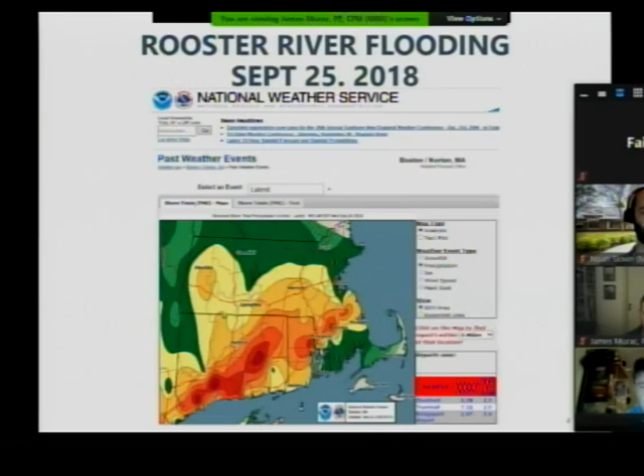Going along the timeline, this is just a quick recap, just to let people know that even though we haven't had a meeting in quite a while, the project has not been stagnant. It's been moving along. We had our first public meeting with the neighborhoods of Bennett, Bond, and Lilalyn. The second meeting we had was with the Lynbrook group. We had a Board of Selectmen presentation soliciting design funds. On January 17th, two things actually happened.

One is we contracted Milone and MacBroom to perform a feasibility study for the detention. We had picked 7 sites, just to see if they had any feasibility or any potential for detention areas.

We also, that same day, held the Rooster River workshop at the Board of Education there at 501 Kings Highway, where over 100 people attended. You may recall that one.

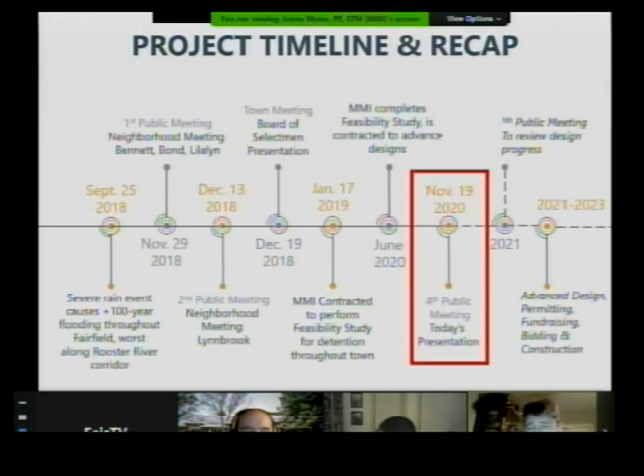So we're going to try to fast track that as soon as we can, but also realize, depending on the project, we don't have to do them all at once. So even though we have a 2 or 3 year window, certainly the smaller projects or ones that don't impact the wetlands as much, we could get done sooner than others. So with that, Jim, take it away. Thank you.

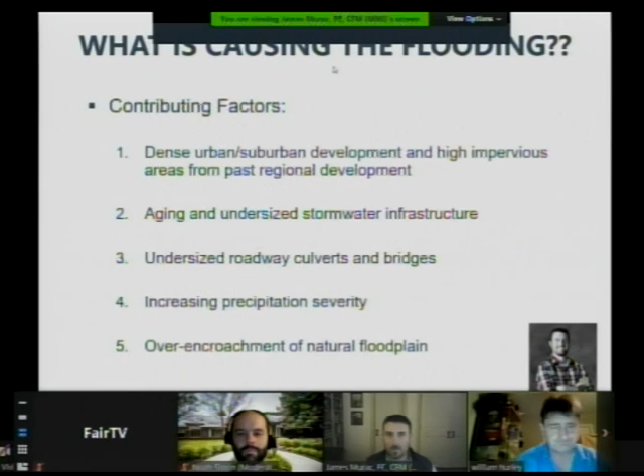Great. Thanks, Bill. You guys hear me okay? Thumbs up? All right, good.

So my name is Jim Murac. I'm a professional engineer and a certified floodplain manager and a senior engineer in the Water Resources Group of Milone and MacBroom. I've been involved with this project since early to mid 2019, and was approached by the town to get involved in looking at how we could address flooding in the Rooster River watershed.

Our contract was pretty specific in that we were looking at detention throughout the Rooster River watershed area. But for a lot of you out there who maybe don't know how we arrived at that conclusion, I wanted to give a little bit of background of why the watershed's flooding and why detention makes the most sense at this stage. So I'm just going to flip through these slides and give a quick breakdown of where this water is coming from and ways we would typically be able to deal with it.

The Rooster River is a very urban watershed. It's been historically developed quite densely since even the 50s and 60s. So there's a lot of impervious surfaces. There's roofs, parking lots, roads, and driveways, which don't infiltrate water into the ground the same way that woods and leaves and grass do.

Back before there was development here, rainwater that would fall on a wooded area would infiltrate into the ground, and it would slowly make its way to a brook, which would make its way to a river, which would take hours or days. Now with driveways and roofs and roadways, that same water is hitting the pavement, running off immediately, and arriving in these brooks in minutes. These brooks were never large enough to handle that amount of water that quickly. So development in high impervious areas is one huge factor in causing flooding.

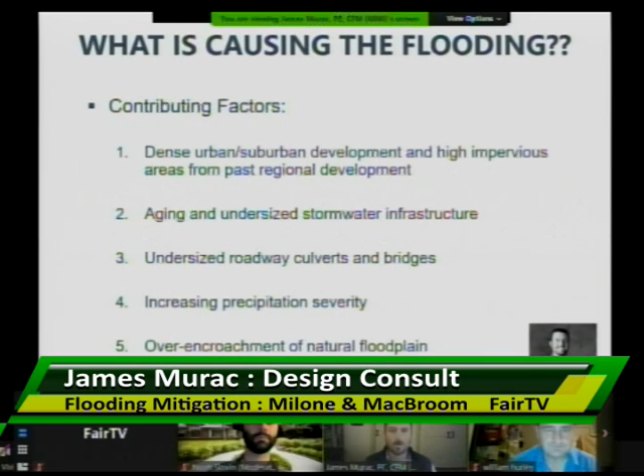You have a wide floodplain bench that's very connected to the river channel itself, and any time the water rises ever so slightly up to its banks, it goes out on this wide flat floodplain with all this vegetation and loses all of that energy. It's very spread out. All of the energy is wasted on that floodplain.

When you start filling in that floodplain and building in that floodplain, you're now concentrating that water and that energy into deeper, faster channels. It's just the same as when you sit down in a full bathtub and your body displaces that water; now you're displacing that water, which causes the water surface to rise. If you continue with that trend, it just becomes more extreme. As you start building walls on the sides, you're displacing more and more water that used to spread out.

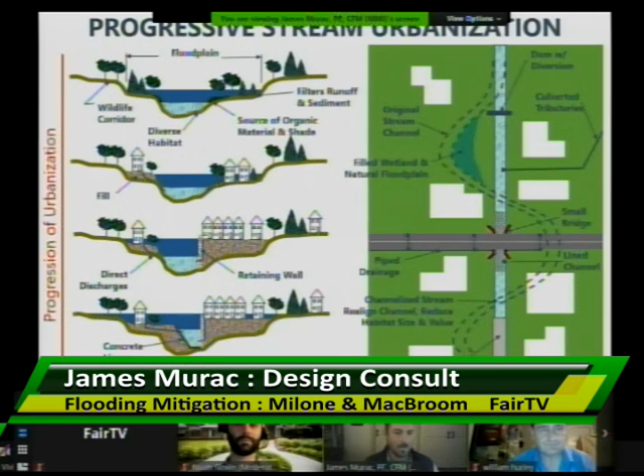And then if you channelize, this one illustrates a concrete liner on the channel. This doesn't happen all the time, but in the 1950s, the Army Corps loved putting rivers in concrete channels. It's just one more worsening. And then finally, putting it into a culvert, burying it underground completely, is the final step.

And you can see at each step, the same house that maybe didn't flood in the beginning starts to flood a little, then floods more, and more houses are flooding, and finally, all the houses are flooding because you've displaced so much of the natural floodplain. There's simply no more areas for the water to go.

So flipping through those causes and the reasons that we're here tonight, how do we address flooding? Well, we look at each one of those causes and we try to address it.

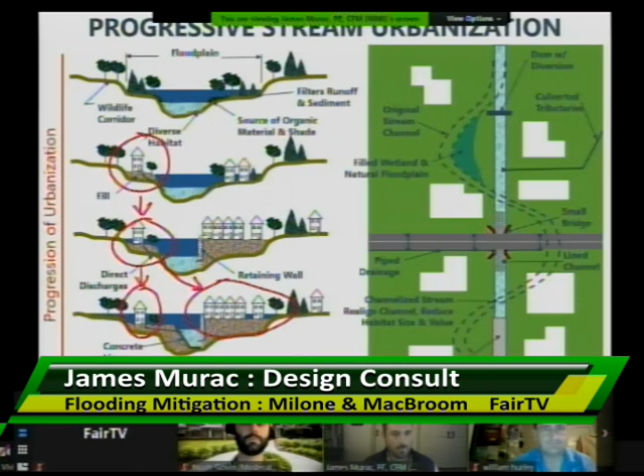So you can address urban and suburban development, but primarily you do that through regulation, through planning and zoning, wetlands, and other regulatory bodies that will have an impact in the future, but aren't necessarily going to change anything today.

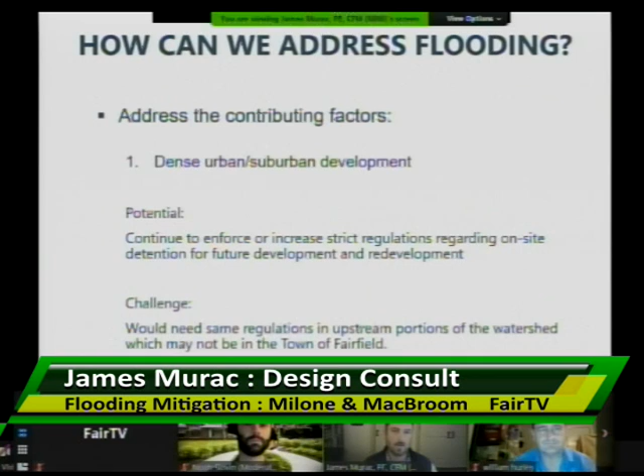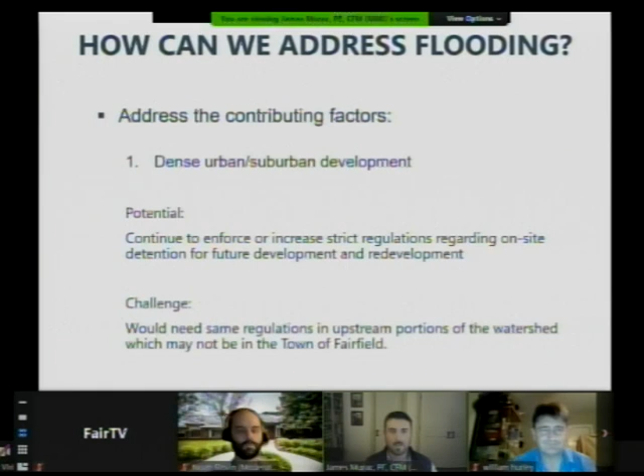And the other challenge with that I should mention too, is a lot of the water that comes from out of town, from communities from the north, you would need to have support from those communities as well, because water doesn't respect municipal boundaries. So if there are communities to the north that are highly developed and they're sending a lot of water downstream, that has to be a team effort with everyone involved.

Aging and undersized stormwater infrastructure, this should absolutely be something that every community is addressing and has on their radar, and that involves going through and having an inventory of their infrastructure townwide and understanding where things need to be fixed, the same way you would do road paving and say, this particular area is up for reinvestment, and then you have a cycle, and your public works department would just continue to do that, as I'm sure that they do. Again, this is something that's not going to fix things today, but it can incrementally fix things.

The other thing to consider with this is that as you have an inundated river such as the Rooster River, where flooding is so rampant, if you start incrementally fixing flooding problems way up in the upper portions of the watershed, you could be making it worse for those downstream. There's a finite amount of volume of water, and if it's not flooding one area, it's potentially flooding somewhere else.

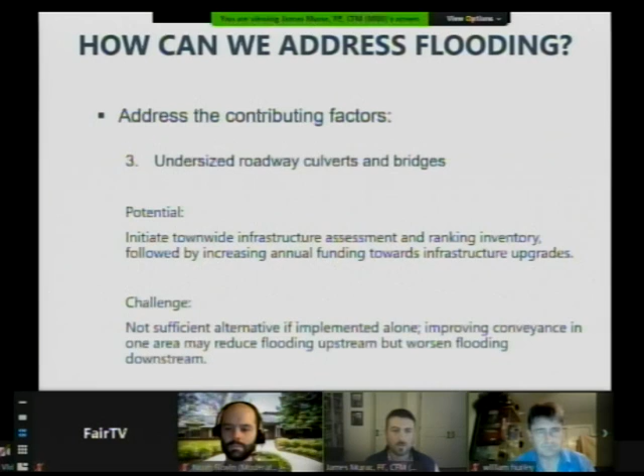So the same thing applies for undersized roadways, bridges, and culverts. Increasing the size of these will make them less prone to debris blockages, like the image that Bill showed you earlier, but it also could worsen things downstream.

Increasing precipitation severity, we can't really do too much about. The thing that we can do about it, as I started to mention, was that engineering practice is starting to catch up. Back when I started my career in 2005, Connecticut DOT was still designing things based on precipitation data that was captured from 1942 to like the 1980s. So that was historic data, and as we know, things have been changing.

The engineering practice has evolved since then, thankfully, and we are actually now looking at future projections and trying to look at the vast wealth of data that we have and extrapolating where that data is leading us. So if you design a bridge that has a 100-year service life, we're now designing things to accommodate what's going to happen in 100 years, not for what was happening 100 years ago.

And the fifth and the final contributing factor, which is why we're here, is the encroachment of the floodplain. So a lot of urban communities have this problem. It's all throughout New England and old post-industrial mill towns. Many of these rivers were encroached on. But that also leads to the lack of available real estate to reclaim any of these floodplain areas. So instead of being able to reclaim floodplain areas, we're looking at detention, which serves a very similar purpose.

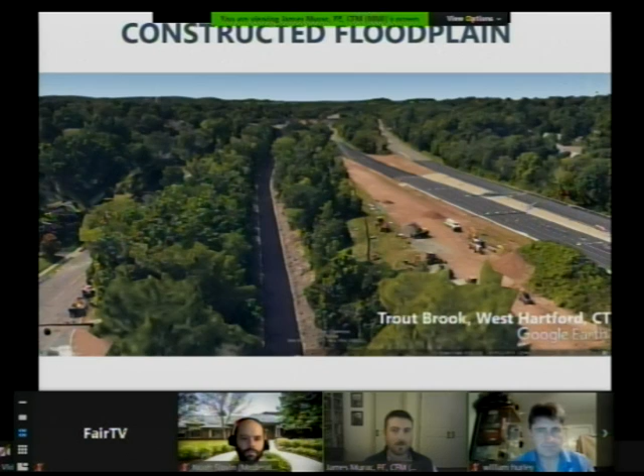So I just wanted to run through a couple quick examples to illustrate what I'm talking about. This is West Hartford. This is Trout Brook. It goes right through the center of downtown West Hartford. And this is one of those concrete lined channels I was talking about that the Army Corps loved to do right after the flood of 1955 all throughout the state.

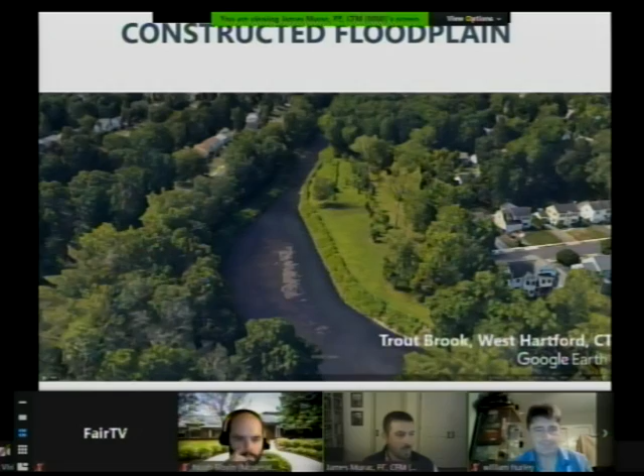But they were finding that the concrete channel was overtopping because precipitation was increasing, and they had sized it for old data. So what they did in the 80s and 90s, they hired Milone and MacBroom to look at creative solutions to fixing this, and this is what they came up with. They widened out that channel, got rid of all the concrete, and made a naturalized floodplain, right?

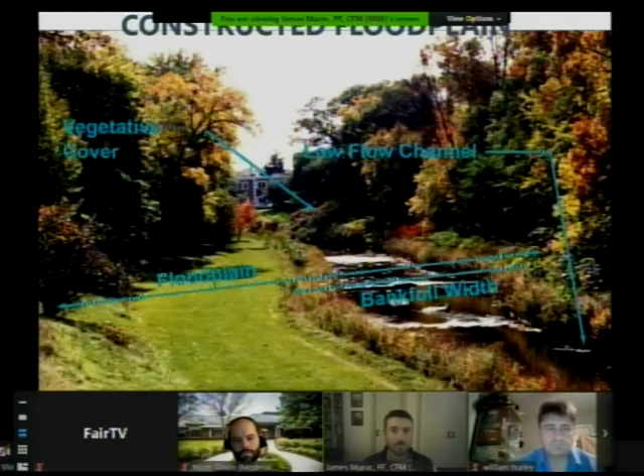So you have the bank, they call it the bankfull channel, which is sort of a sunny day stream that you see every day. But then you create that vegetated floodplain that allows for the water to expand out and harmlessly flood an area versus harmfully flooding a downtown area. It's been wildly successful. It's worked great for years. They've mitigated all of the flooding that was happening in downtown. I thought that was a relevant example because I know that there are portions of the Rooster River that look a lot like that.

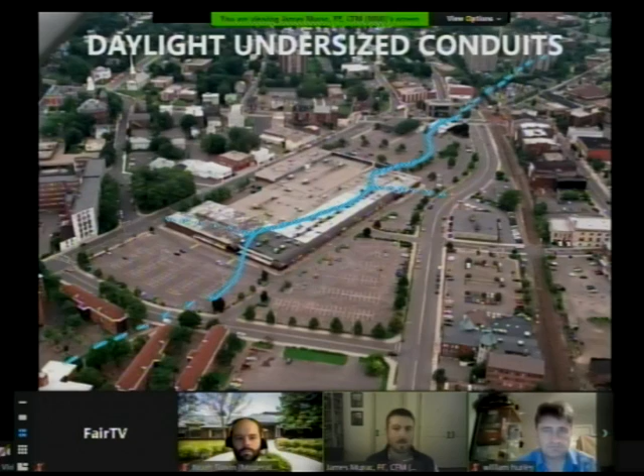The Harbor Brook, you can't see it, but it's underground along this blue line with 2 tributaries that come in, and it's a half a mile long of culverts of various sizes and shapes and configurations and ages that were just built up over time. So the city was interested in daylighting this whole area and creating a detention area and a floodplain area that could absorb some of that flood volume and help areas downstream in other portions of the city.

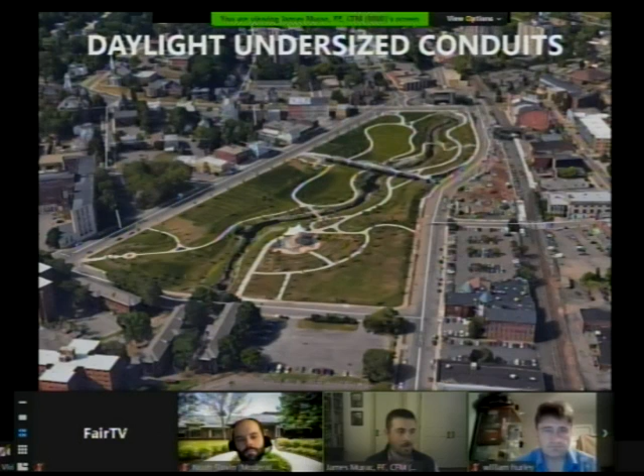So that's what we did. MMI was the lead designer on this. It was a $4.4 million project. They finished it 3 years ago. This is what it looks like today. They took the opportunity of having this flood detention area to make it into a green public space.

That's a park that most of the time is dry, but they put up the signs and made it resilient to flooding, so that in the instance of a severe flood coming through, people would be notified. People could safely leave, it would flood, then the floodwaters would recede, and they can just continue using it a day or two later.

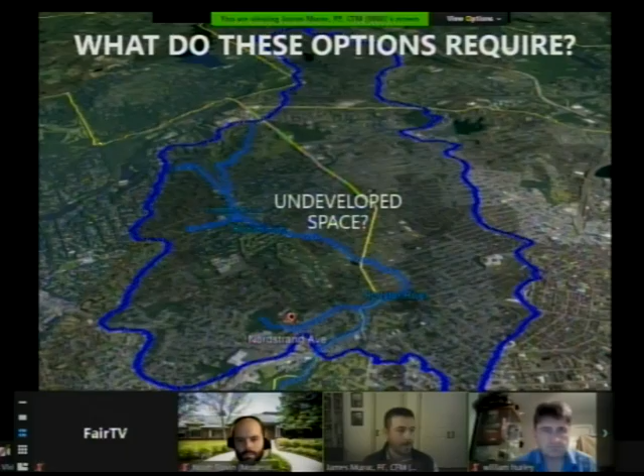I thought this was a relevant example because not only is it basically what we're talking about here when we say detention, but the Rooster River watershed has a number of areas where segments of it are below ground, and we're going to talk about some of those tonight. So those 2 options are great, but what they both require is undeveloped space. This is an image of the Rooster River watershed, with the yellow line being the town boundary between Fairfield and Bridgeport. And you can see there's just not a lot of undeveloped space.

So that leads us to our detention feasibility study. Given the constraints of space, 7 sites were identified by the town of Fairfield for us to look at and see if detention makes sense at any of them. On the slide, I say 6 sites. One of them was found not to be something that we wanted to pursue further. The cost-benefit ratio didn't make sense on that particular site, and it did not have an impact on flooding. The other 6 we think could.

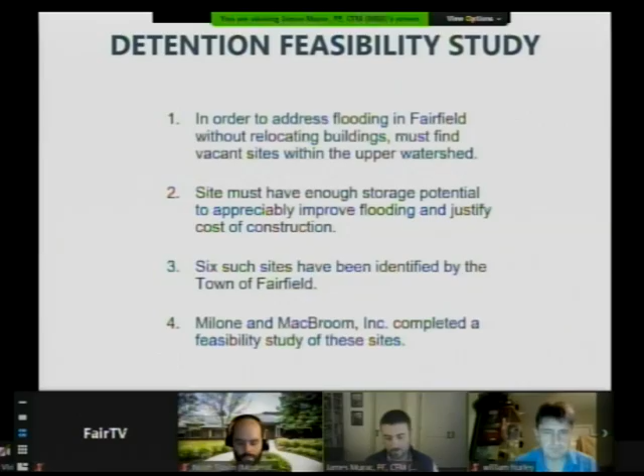So this is a quick fly video. I don't know how it's going to work over the internet. Hopefully it works for you depending on your internet speed.

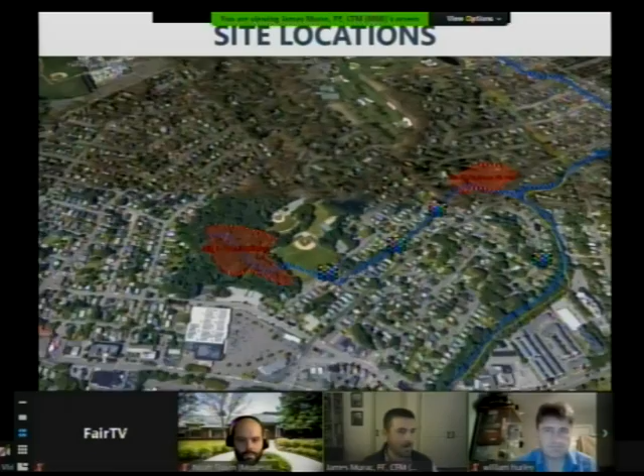This will show you where those 6 sites are located, starting at Ash Creek at Long Island Sound and going upstream. Zooming around here, we see these blue waves where flooding was reported during September 25th. It's not a comprehensive list, but it's some of what we have. Site 1 is Tunxis Hill Park on the left, and Site 2 is the Algonquin Road area. They're highlighted in red. Site 3 is the Melville Playground.

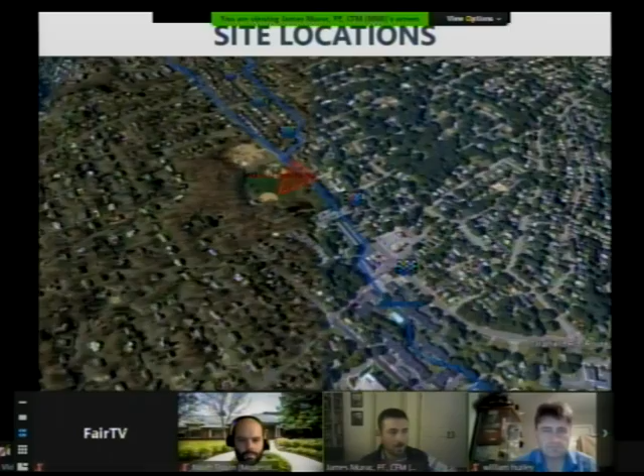Going up along Stratfield Road, we see a lot of flooding that was reported. Site 4 is Lieutenant Owen Fish Park. Trying not to speak too quickly. Flooding in the Bennett Pond area. Site 5 is Woodfield Village, and then Site 6 is Fairchild Wheeler Country Club.

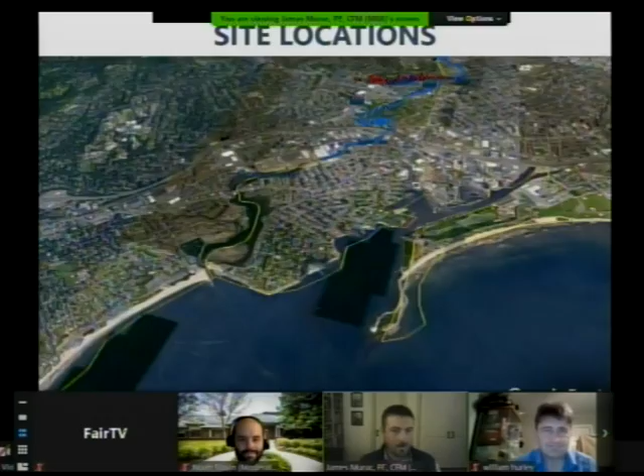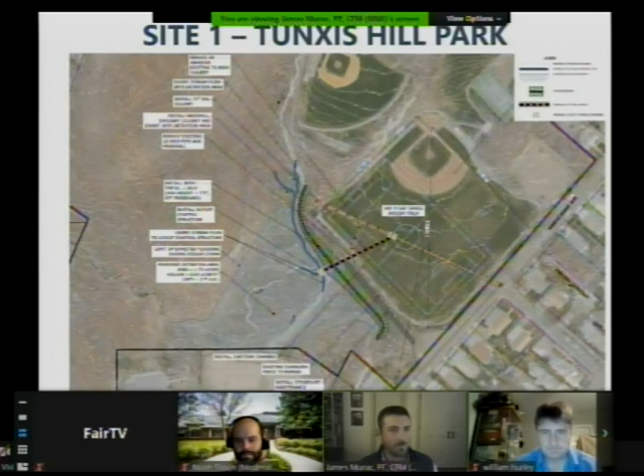So now I'm going to hand it over to Jay Williams, a landscape architect with MMI, who's going to briefly go through each of those sites and some of the elements we've developed in our concept. Thanks, Jim. Again, my name is Jason Williams. I'm a principal landscape architect with Milone and MacBroom.

I just want to walk through some of the elements of our concepts for the stormwater management that Jim talked about on these sites, starting with Tunxis Hill Park. We understand that there is significant flooding within the area of residential homes on Nordstrand Avenue, Villa Place, and Melville Avenue.

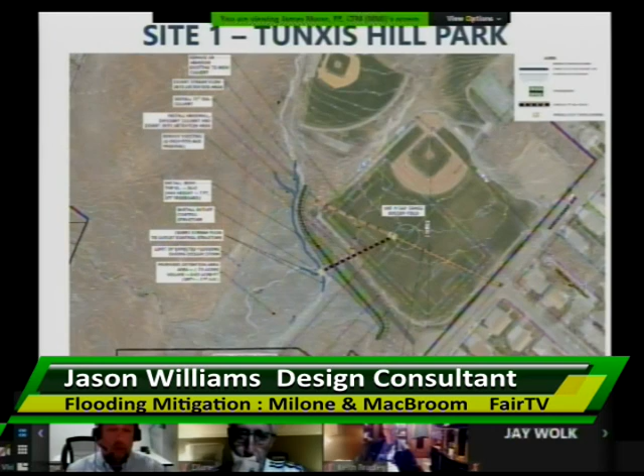There are 4 tributaries that head north and east through the wooded area in the lower left-hand corner. These tributaries combine in a pipe which runs on the western portion of the field, through the pipe underneath the field where you can see the X's, and continues out to the roadway.

Essentially, these tributaries overwhelm the existing pipe networks, and the surcharging water backs up and overflows across the athletic fields, down Nordstrand Avenue and Villa Place, and into driveways, yards and homes along Villa Avenue until it recombines with the tributary downstream. So what's one option we can do to really limit this flooding? Well, if we could go back for one sec there.

So as you can see in blue, reconfiguring the stream channels so that they move to the south and all tie in to a new outlet control structure. This is a large box that essentially takes all the storm water into it, and with a high level overflow, then discharges out underground into the center of the field into a new junction box.

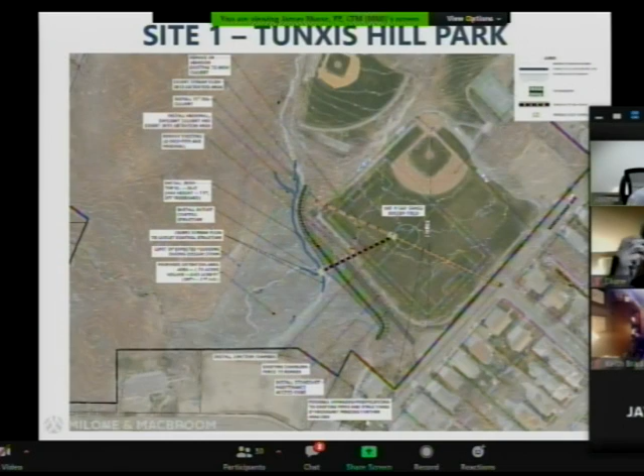But with all of the water in these tributaries coming down and flooding the field, we've got to detain it. So as you can see in green, we have a berm which runs from the northwest to the southeast and really holds back a lot of that water. In blue, you can see a proposed detention area, which is about 1.7 acres. So it's a substantial area within the woodland that would detain the water.

Once this area is detained, it goes into the outlet control structure, into the junction chamber under the ground. It would continue out onto Nordstrand Avenue underground in a pipe. Using the existing pipe is what we're currently showing, but further analysis may prove that we'd have to provide potential upgrades to that pipe. Next.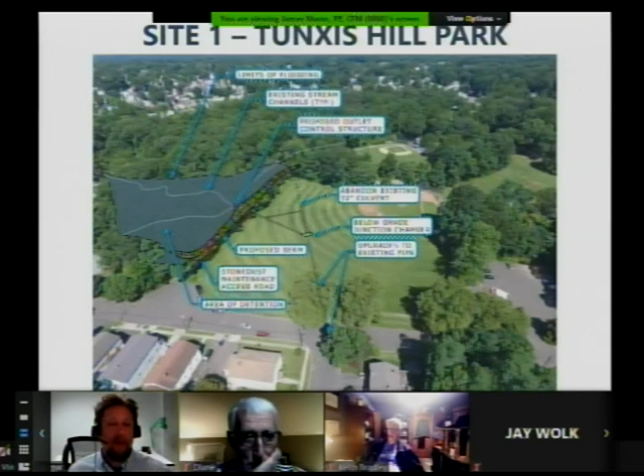So from a drone aerial view, you can see on the bottom we've got Nordstrom Avenue, and we're looking west, and you can see the athletic fields and everything that I just explained. Our berm, which is running on the left-hand side, just outside of the field of play. So I think that's important. In all of our concepts, none of our improvements are impacting any of the athletic fields of play. The berm holding back the detained water, everything going into the outlet structure, pipe underground, and then out to Nordstrom. Next slide.

In order to maintain this berm, which would be vegetated with plants and also serve a dual purpose as almost bleacher seating, we would install a stone dust maintenance access road so that the area could be weed whacked. We limit any invasive plants that are growing on it. We keep the existing chain link fence that identifies the limits of the athletic field and potentially plant some nice shade trees along Nordstrom Avenue. Next.

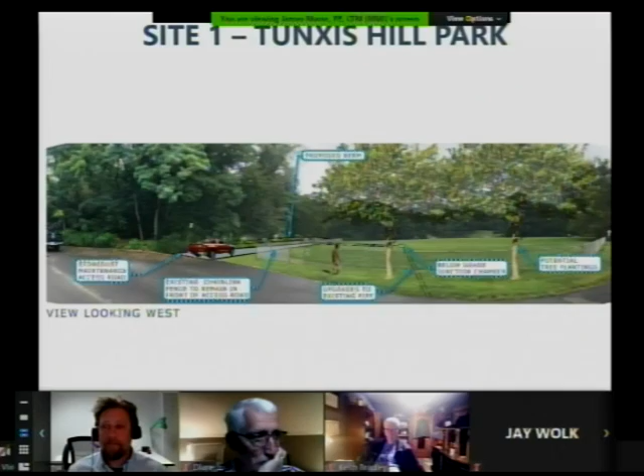So Algonquin Road is our next site. This is a privately owned parcel between Villa Avenue and Algonquin Road. This was identified as a possible candidate for the creation of a detention area. Why? Because the parcel is located just upstream of where the same tributary that flows through Tunxis Hill Park and discharges into the Rooster River lies. The parcel currently is undeveloped.

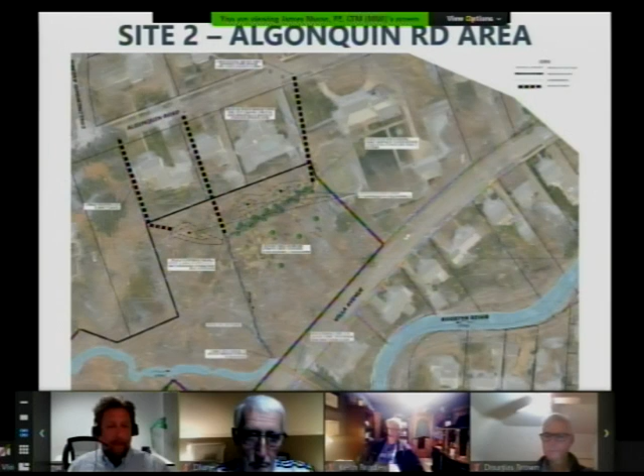It's mainly forested woodland. Now, significant roadway flooding occurs along Algonquin Road, and while there are 2 existing catch basins, the one on the right and in the center, that take storm waters underground in 2 existing pipes and discharge them into this open woodland area, we would be looking at a couple of things. One, potentially identifying the need to increase sizing of the catch basins or the pipes, and then adding an additional catch basin and pipe on the left-hand side to take on some of the flooding on Algonquin Road.

Once all of the stormwater goes through these pipes and enters the woodland, we'd be daylighting the pipes into open channels and creating depressional areas, as you can see with the dashed lines, to further detain some of the water. Water would continue to the south and enter the culvert under Villa Avenue and onto Rooster River.

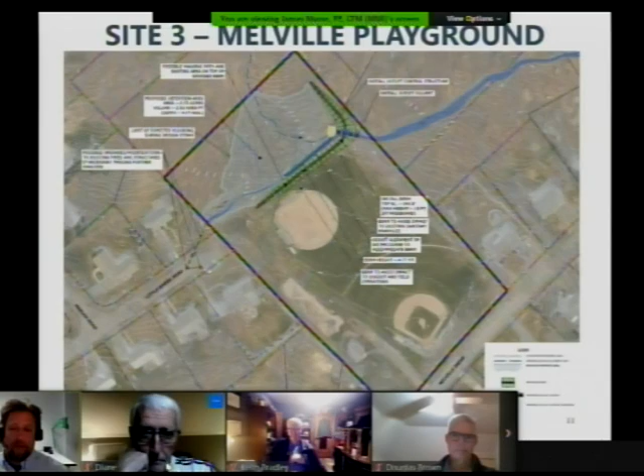Melville Playground is an important site. It's owned by the town. It's located along an unnamed tributary of the Rooster River. Roadway drainage from Little Brook Road, as you can see on the left, discharges just to the north of the park or the baseball fields, and the water course runs to the northeast along essentially the border of the baseball field.

In heavy rains, we've got a lot of flooding in this area, and so we want to hold back the water, again, with the installation of a berm to detain approximately 3/4 of an acre of water with the one main tributary heading down into the south. That all ties into an outlet control structure, as you can see in the cream color, with a pipe underneath the berm that then spills out to the northeast.

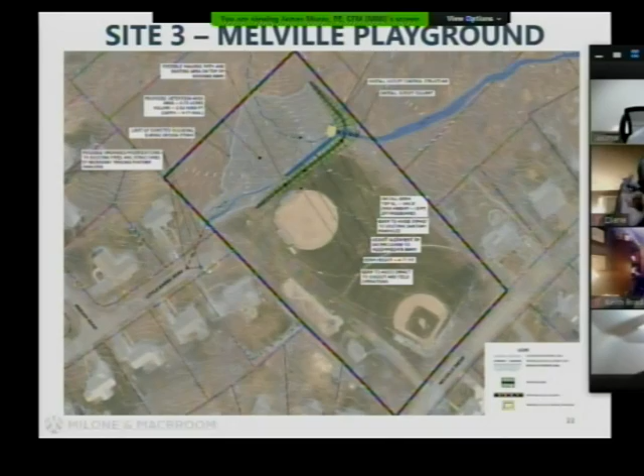Next. So here's an aerial view, again, looking to the northeast of Melville Playground. And you can see the berm, which is running just along the edge of the baseball field, that also could double, as I said, again, as almost bleacher seating. There could be a walkway on top of it, but the berm really helps to detain all of this water in the forested wetland and controlled through the outlet structure.

Next. This perspective view is also looking to the northeast and shows what that potential berm could look like. Based on this project and the hydraulic analysis that we'll be doing in the future, we wanted to show 2 options that identify different volumes of water that we can hold back so that we can show that maybe this berm wants to be 4 feet in height with seating and a walkway on top of it, or maybe this berm really needs to be more in the range of 7 feet tall.

Lieutenant Owen Fish Park, again, owned by the town, and located on London's Brook, which is another tributary of Rooster River. Currently, it flows beneath the larger baseball diamond at the top of the image in 2 6-foot wide by 3.5-foot high pipes. So it's taking on a tremendous amount of water.

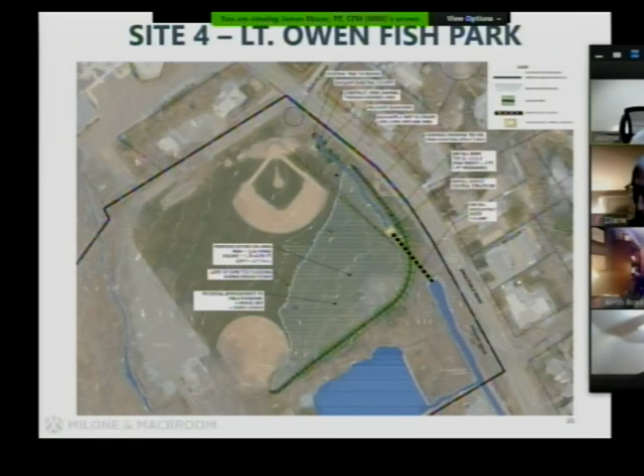This site is very important because providing detention at this site really has the potential to decrease the overall flows in the Rooster River watershed because it's located in the upper third portion of the Rooster River watershed. And lowering these flows really are going to benefit all of the properties that are located downstream in the floodplain of London's Brook.

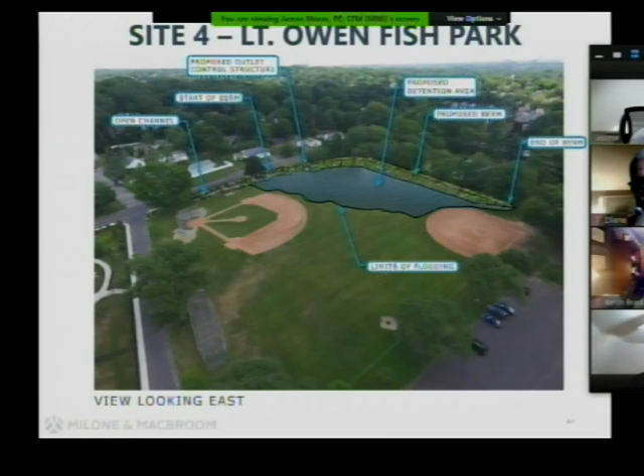As part of this project, we'd also be proposing a berm, as you can see, at the edges of the athletic play area, so the berm won't impact any play. The installation of the berm holds back, it detains the water, and you can see the limit of flooding that would encompass this area. But also more importantly, as I mentioned before, if you can see on the left-hand side, there's a very large tree on the corner. And it's from this area that these underground pipes continue along the roadway there.

What we'd be proposing to do is to open up that channel, similar to what Jim showed in Meriden with the Meriden Green, but on a much smaller level. If we can get the water out of these pipes, let it branch out into kind of a micro stream with micro floodplains, herbaceous plantings, pollinator species planted, boulders for kids to sit on, we're not only providing a stormwater element but we're also really creating a placemaking element. So families are watching ball games, kids are sitting on the sides of the streams, there's butterflies moving through.

With this open channel that moves into the lower London's Brook. Once flooded, you can see the proposed outlet control structure, very similar to previous projects, that would then be piped in a high-level overflow through the berm and into London's Brook.

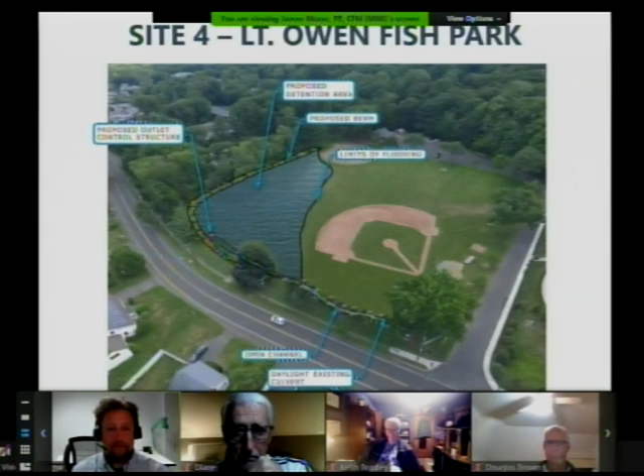Another view of this from the roadway looking southwest, you can see that daylighted existing culvert on the bottom of the page and the open channel running along the side there and the sidewalk. I mean, really kind of a beautiful element for even driving along the roadway, walking on the sidewalk, and how that continues down to the outlet structure and then further down to London's Brook, which is also daylighted.

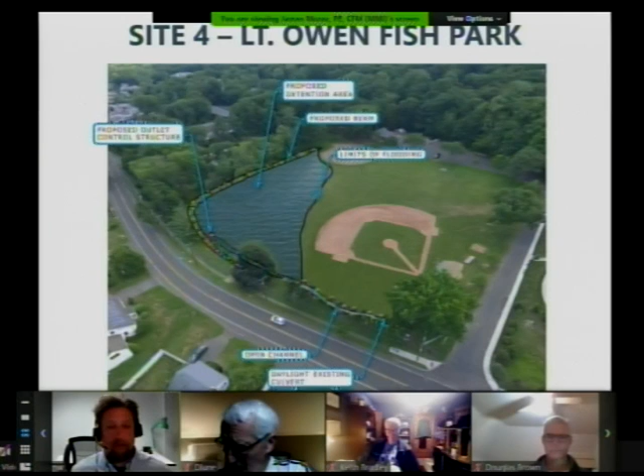Woodfield Village is our fifth site. This is a condominium development that actually includes a lot of detention basins throughout the site. Most of the detention basins are in forested woodlands, and they are controlled by 12-foot by 12-foot concrete outlet structures that have a sluice gate in them. These sluice gates are mainly left open in accordance with the original engineering design that was done with them.

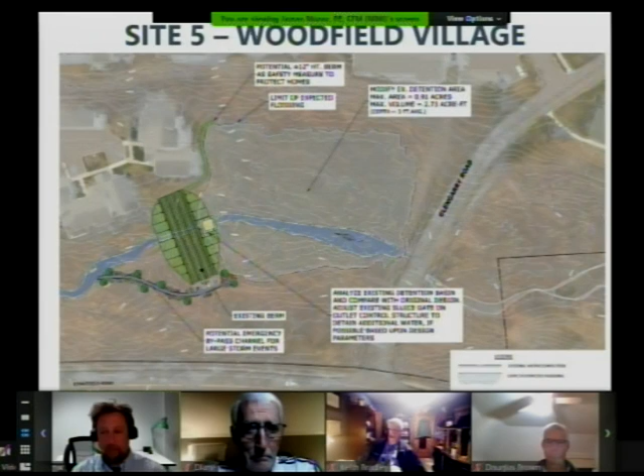This concept proposes to increase the detention at one or maybe more based on our hydraulic analysis that really would include just very slight modifications to the actual structure, as you can see in cream, no monumental structural changes. As you can see in green, there's an existing earthen berm here. As part of this project, heading to the north of this berm, we would install a 12-inch high, small little berm. Really, the main reason for this is to protect that one home there. We obviously... go back.

Sorry, Jay, I didn't mean to do that. I did want to just clarify that would be a 12-inch berm. Oh, did I say 12 feet? Sorry about that. Yeah, so, just a small little berm to further detain the area.

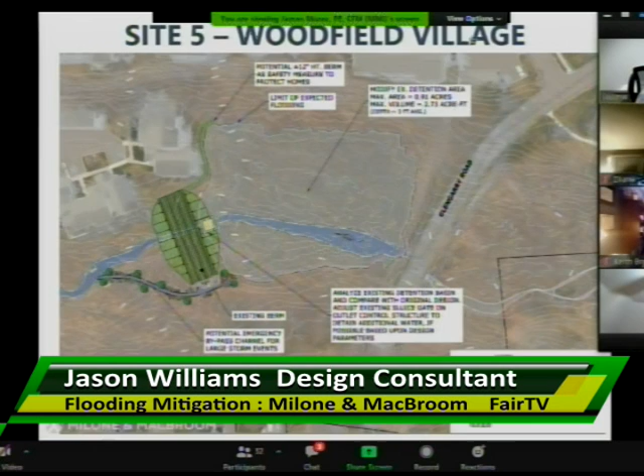And you can see the area of detention. It's approximately 1 acre, so it is a pretty large area. But also just on the southern side of that, we would be installing what we call an emergency bypass channel, which is nothing more than a small little stream with plantings around it that acts almost as a pressure release valve when the detention area does fill up. We're providing an area for this water to release and continue down and tie into the brook.

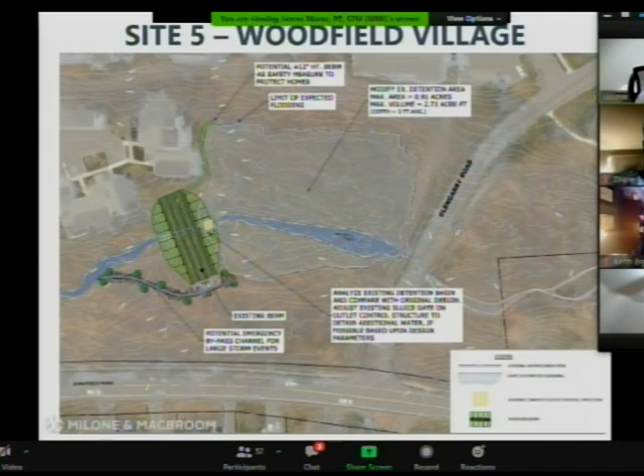Fairchild Wheeler Country Club is our last site. Most people on the call probably are familiar with the country club. It's actually located in Bridgeport. The property is located at the headwaters of London Brook. It's directly upstream of Bennett Street and Bond Street, where severe flooding has occurred. Additionally, there's flooding that occurs on residences on Casimir Drive.

As part of this project, we'd be looking along this southern property line here to install a new berm, just to the right of that to tie an existing drainage swale just behind that berm into another outlet control structure, which you can see in the cream color. So as you can see, moving through the golf course is this existing stream where cart paths do traverse over.

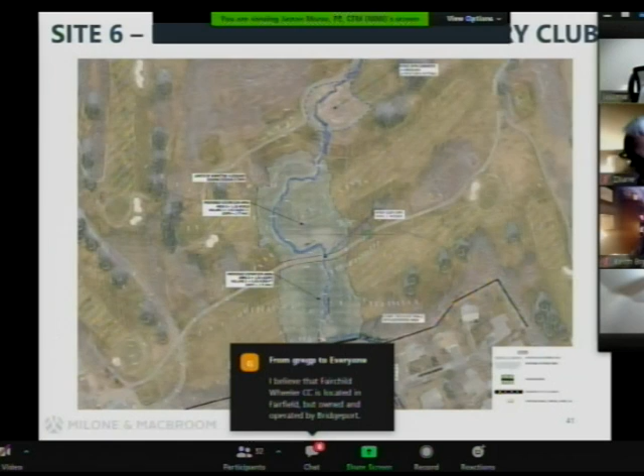And at the very top of the page, what was once a pond that has filled in with sediments. It's got invasive plants in it. So stage one is cleaning this out, getting all the muck out of there, getting rid of the invasives, and using this small area as a detention pond, but also planting it with a riparian buffer so it does have some habitat value and aesthetic value as you're driving on the cart path just to the north of it.

With the installation of the berm, you can see we've got a significant area, almost 4 acres, and then another 3 acres, almost 7 acres of detention of the stream channel that really just ties into the existing contours within the golf course.

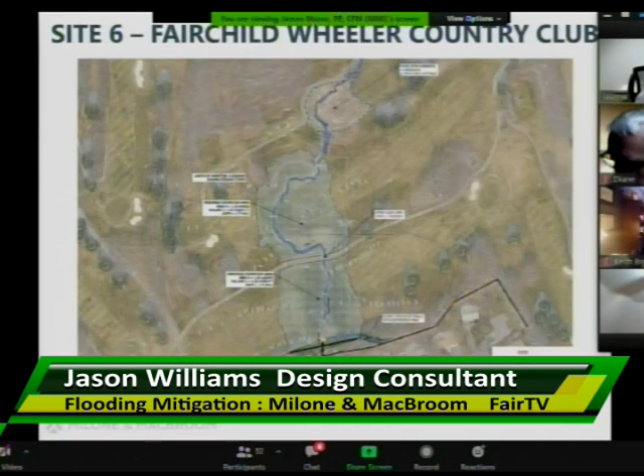I think we have an aerial, right. So here you can see just a side view, and on the right-hand side, this berm, which is running along the property lines of the residential homes on Casimir Drive, the outlet structure, which is taking in all of the waters coming down, and the potential limits of flooding and proposed detention area.

This picture is actually taken from the back of those residential properties on Casimir Drive looking into the golf course, and you can see a representation of that berm holding back the detained water and planted with various types of native vegetation.

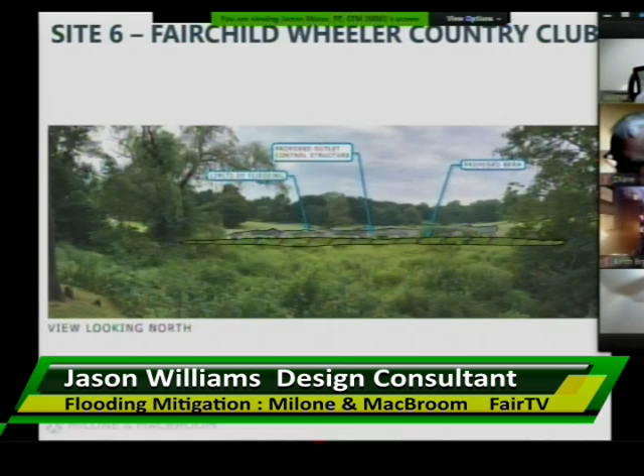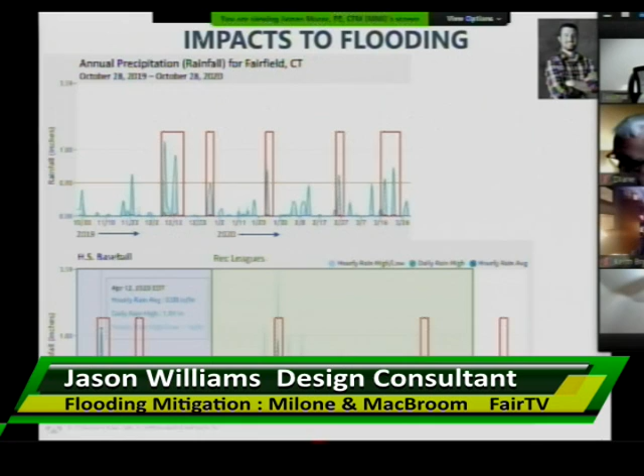Jim? All right. Jay, are you all set? I'm all set, thanks. Excellent, thank you. That was great. So I was going to jump back in and I have two more slides, and then I'll hand it back over to Bill to kind of let you guys know what the next steps are here.

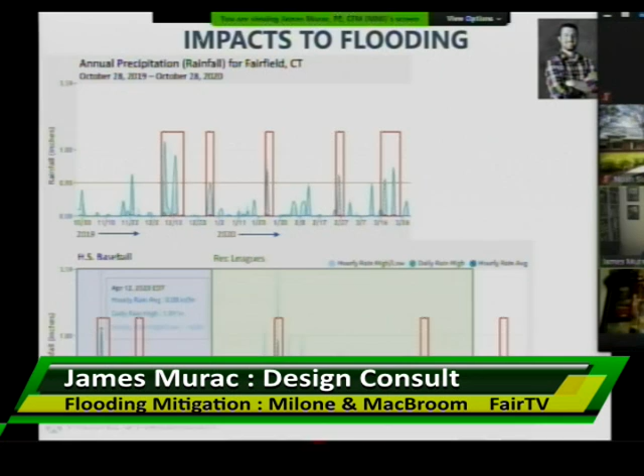So those are the projects we've come up with from a conceptual perspective. And I'm sure a lot of you are thinking, okay, well, what is this actually going to do for my home, my business, where I live? How much is this going to impact flooding? And the answer is all of these projects have the potential to help quite a bit. And we did do a screening level analysis to determine that that's the case.

But we don't have the details here at this conceptual design stage to be able to answer a lot of those detailed questions. We're here for you today to present what we've got, to get your input, and to take all that input to bring these projects to the next level. Because the engineering analysis to answer that question, that this project will help flooding at this address by 9 inches or whatever, is very, very complex, and it relies on the details of that design.

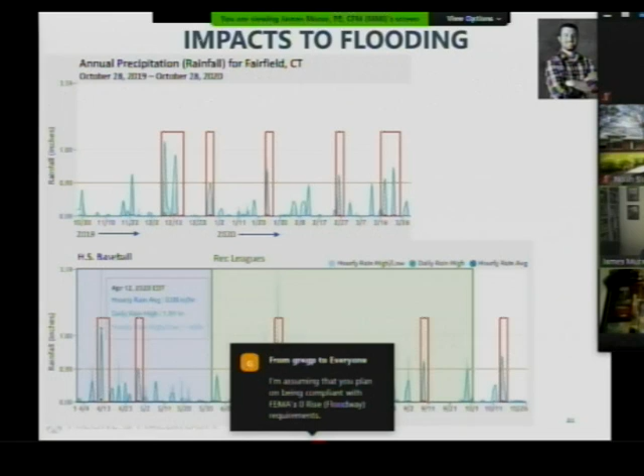And as you can see, the most detail that we have are these renderings and sketches, of which we have no actual engineering data. So I wanted to just mention that, and I wanted to show this slide because I know another question you may have is, at Lieutenant Owen Fish Park, where we're proposing a detention system that utilizes some of the outfield, how often is that going to flood? So the answer to that is, again, we don't know yet because we need to make that decision together. We need to have some input from the community.

Depending on how often it is made to flood based on the design, there will be more benefit downstream. And so it's sort of a balancing act that needs to be weighed. In this completely theoretical example that I pulled, this is the last 365 days of rainfall in Fairfield. And I drew an orange horizontal line at the 0.5-inch mark to illustrate what would happen if we designed this detention basin to flood every time we get 0.5 inches or more of rain.

If that happened to be the case, this timeline, and unfortunately I had to break it into 2 sections to fit on the slide, but starting on the left,

laser pointer, that's neat. Starting on the left on October 30th, 2019, these red boxes indicate times where the water would have been out onto the floodplain or into the outfield of Lieutenant Owen Fish Park if this was the design. So you have 1, 2, 3, 4, 5 instances through March and another 5 through the rest of the year, so 10 instances in that year. Obviously, every year is different.

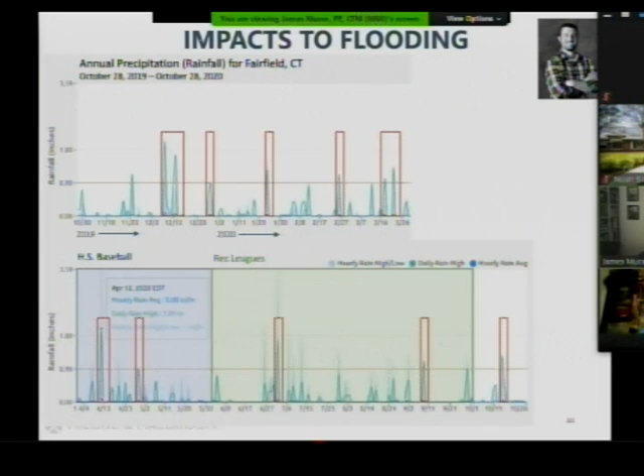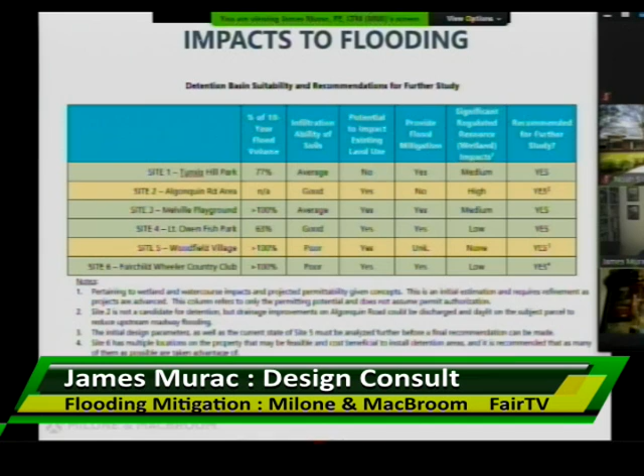And I mentioned that we did sort of a screening level analysis, just to give you a little more of an idea of what that means. This is the result of that analysis. So we sort of looked at the 10-year flood as a litmus: if we can detain 10% of the 10-year flood with how much volume is available on a site, then that probably will make sense financially and will have an appreciable benefit to continue looking at.

If an area was too small to detain that much, then typically the cost of constructing anything there would not achieve an appreciable benefit. And that was the case at one site, as I mentioned earlier in this presentation. We also looked at the infiltration ability, the permeability of the soils. So nice sandy soils that are going to accept water more quickly is obviously something good. Areas with clay and muck and a lot of silt in the ground do not infiltrate as well. So that was a consideration.

We looked at the potential of the land use of that site. So Lieutenant Owen Fish Park is a good example where there are potential impacts that we would have to mitigate with the construction of any project there. Again, we looked at the potential for flood mitigation. And we also looked at the regulated resource impacts. So that's wetlands, forested wetlands, things that might pose a problem when we go to the permitting aspect of this project from Connecticut DEP or the Army Corps who may have concerns. Those are sort of the parameters that we used to get to this level.

And so that is a summary of where we are. That's a summary of how we got here, what we've done to date, and the projects that we have come up with as potential concept ideas for you. I'm going to hand it back over to Bill, and then I think he'll give you an idea of where we're going, and then we're going to open up the floor after that. So thank you.

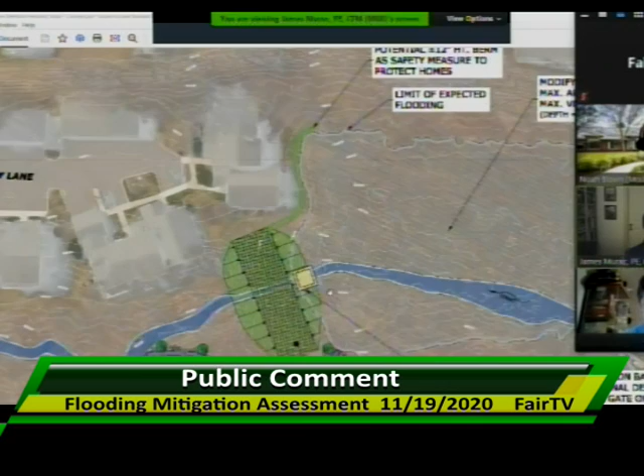So I can briefly share my screen. I've brought up the rendering for Woodfield Village again. Hopefully that works. So I was just looking at this area. I think the question was intended to ask what the slope of this berm is. If I'm misinterpreting that, feel free to add some clarification there. But just measuring this slope, which was constructed when the condos were first built, it's 2-to-1, which is pretty typical of an earthen berm dam. And it's fairly steep, but it's relatively stable.

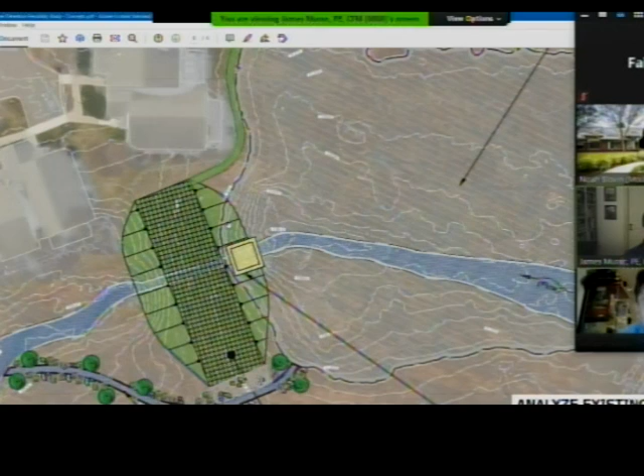I haven't been out there for a few years. I recall that it was wooded. There was a lot of debris and down wood on it. Sometimes when they design and build these, they would riprap and stone protect them, especially on the downstream side, which is where there might be more erosion if there was a flood event that would risk overtopping it.

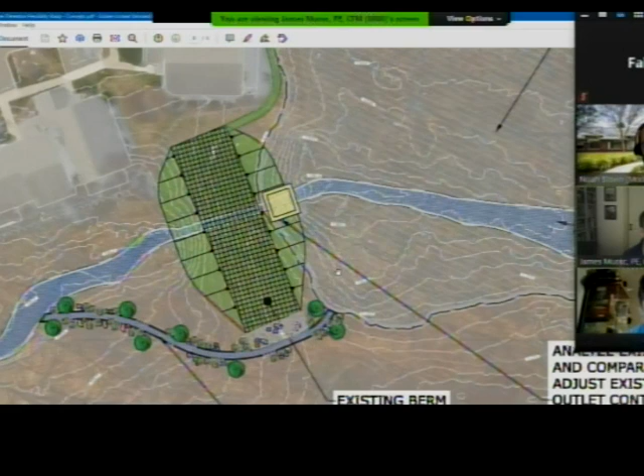Again, not knowing the parameters of how they designed it, there may be even riprap underneath the leaves that we're just not aware of. They may put topsoil over it. We've done that in the past too. So we really want to get our heads into that original design, and certainly any modifications that would be made would be done so with the responsible engineering analysis.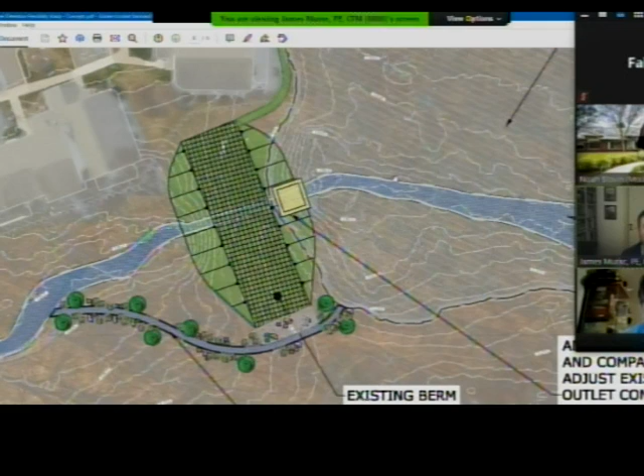It's likely that, given the size of this, if it's not a regulated dam through Connecticut DEP dam safety, then it certainly could or should be, and they have a set of very strict requirements in the alteration to an existing dam. So I wish I had more information on this one for you, but as it stands right now, we just identified it as a possibility. Of the ones we discussed here, to be frank, once we look at that analysis, we could determine that it just doesn't make sense. But it just seemed like an opportunity to at least ask the questions and see if something can be done there.

And Jim, it looks like they're 1-foot contours, reading some of the labels. Yeah. The interval is 1 foot. That's correct.

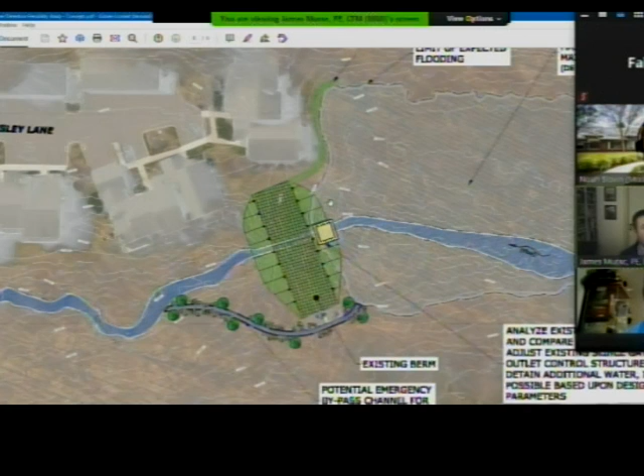All right. Well, I don't have any more questions in the chat, and I don't see any hands raised. There's a comment from Greg pointing out that projects like this are intended to reduce the frequency and intensity of flooding. You can't eliminate flooding completely, and in really intense storms, we'll still have some problems. Yeah, I agree with that statement. It's a good point, Greg.

But again, hopefully the areas that are flooded don't get flooded for as long or as deep. And in some cases, that might be enough to salvage furniture or drywall or whatever. In other cases, it still might not matter. It all depends on each individual location. But he makes a good point. And again, that's what we're all trying to do, is at least reduce the chances. And if you get flooded every 30 years versus every 3 years, I think everybody would agree that that's at least better than the latter, if you know what I mean.

I do have a hand now from Margaret, so I'm going to ask her to unmute. Okay. My question is, how deep do you expect the Woodfield area to get at the deepest? Did you? Yes, we heard you. Thanks. Sorry. Did you get that? Yes. Yeah, thanks, Margaret.